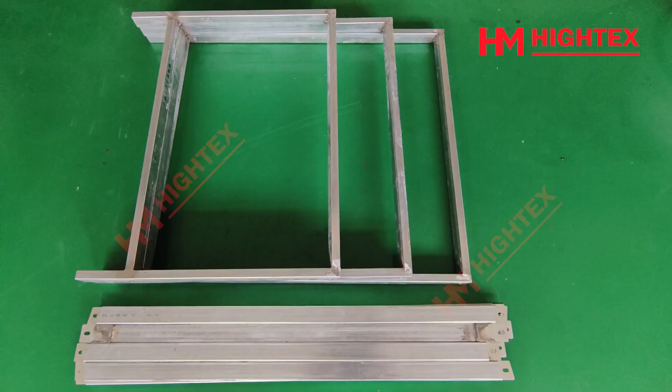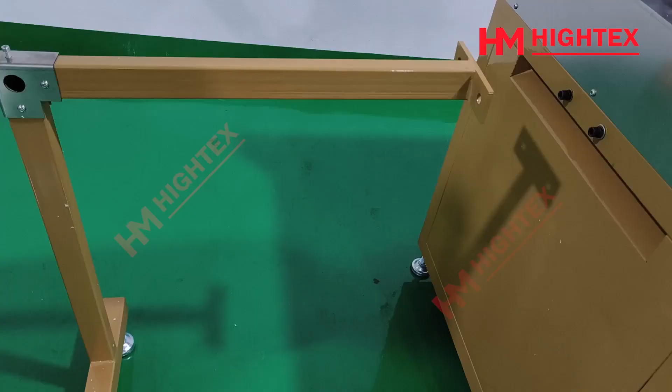Installation: take out the stainless steel racks and install them as shown in the video. Install the conveying plate onto the steel frame and tighten the screws. Take out the stand and fasten it to the machine.

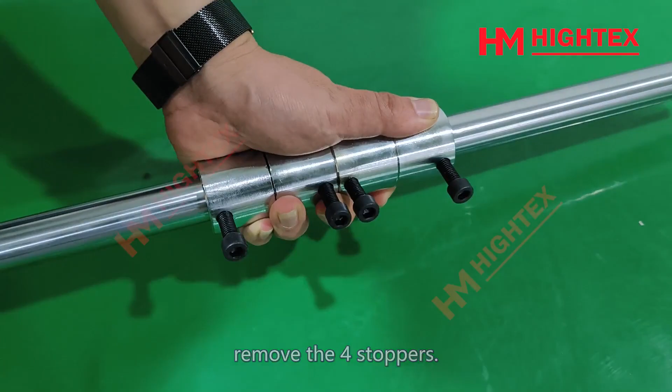This is the feeding rod. Remove the 4 stoppers, insert the feeding rod into this hole, center it, and tighten the bolts.

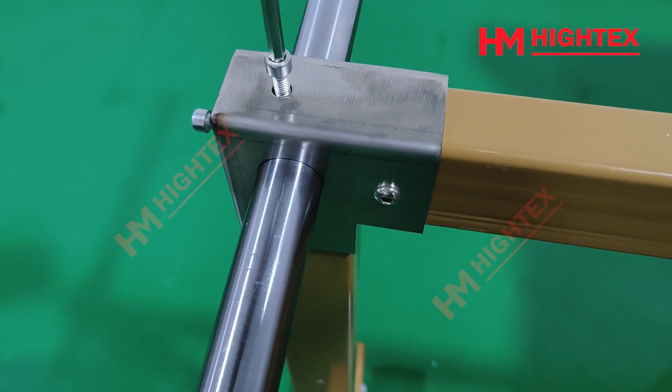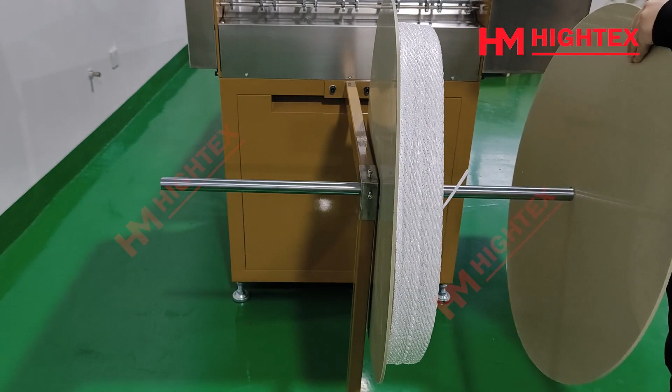Install the spacer plate and webbing strap, and attach the stopper on the outermost side. Install the spacer plate and webbing strap at the other side in the same way.

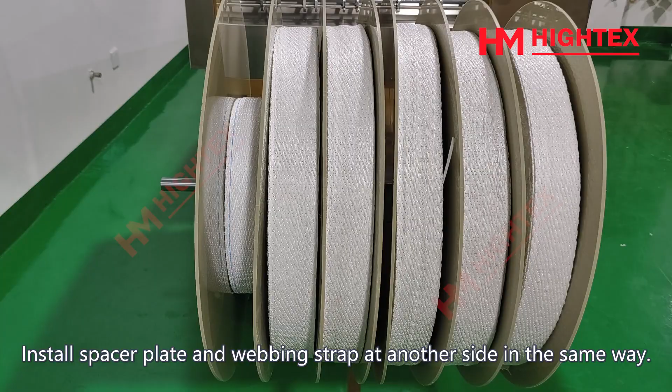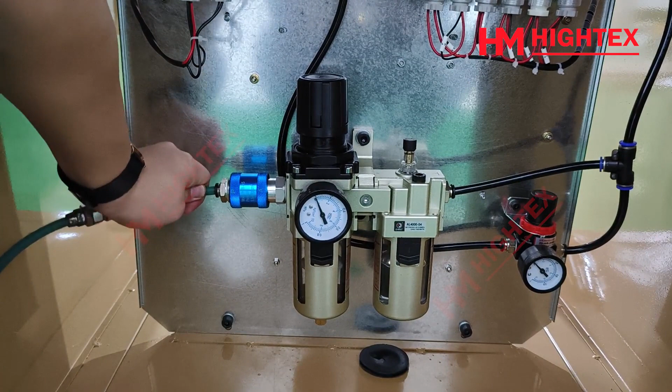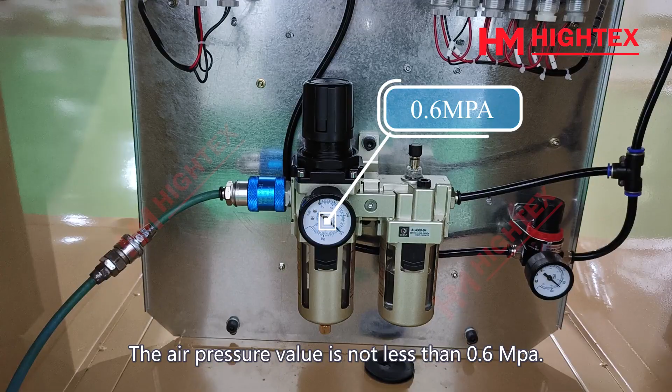2. Connection of air source and power supply. Connect to the air source, flip the blue switch to the right, and turn on the air pressure switch. The air pressure value should not be less than 0.6 MPa. Connect the power cord on the other side: the upper cable with L connects to the live wire, and the lower cable with N connects to the neutral wire.

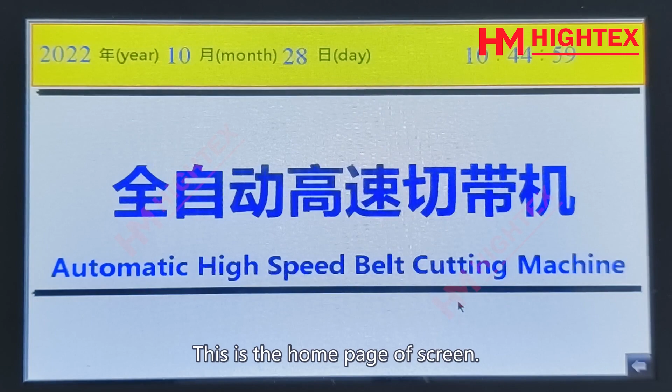3. Hand operation. This is the home page of the screen. Click anywhere to access the interface menu, then click Hand Operation.

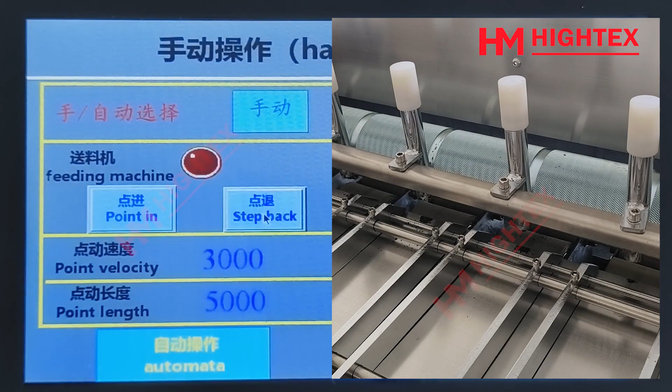Click Point In and the wheel will turn forward. Click Step Back and the wheel will turn backward. Point Velocity means the feeding speed when point marking, and Point Length means the feeding length for each point marking.

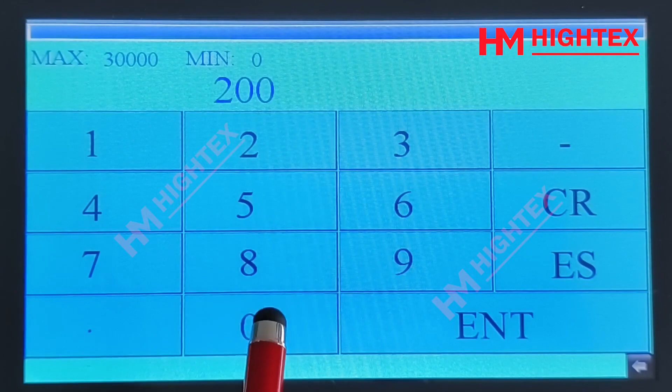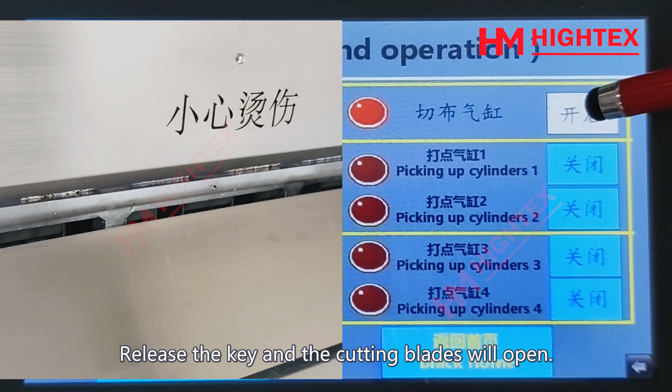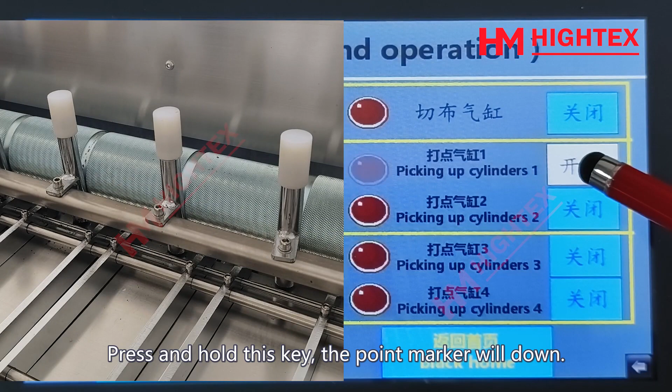This is the manual switch for the cutting cylinder. Press and hold this key and the cutting blade will close; release the key and the cutting blades will open. This is the switch for the marking cylinder. Press and hold this key and the point marker will go down; release the key and the point marker will lift.

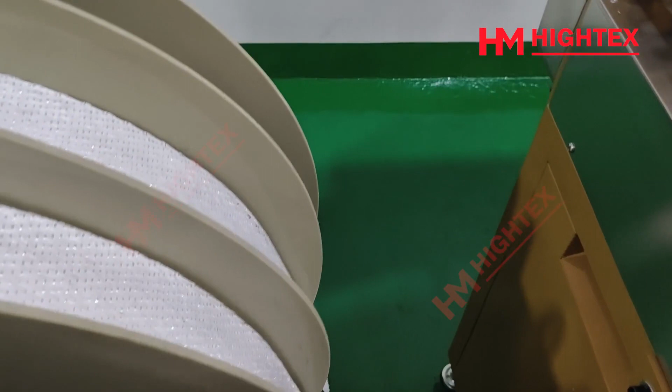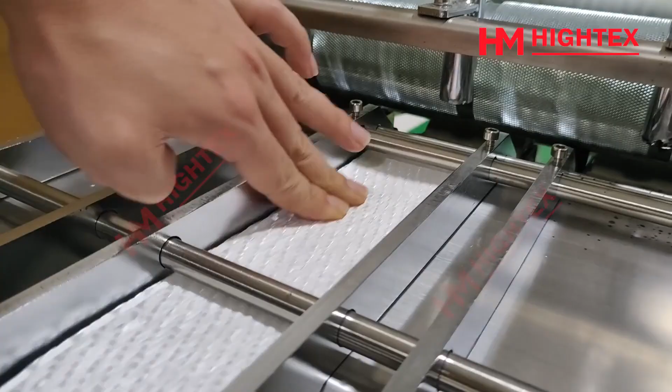For testing: load the webbing strap, move the cover, install the marker pen, then put the cover back. Install the other 3 straps and marker pens in the same way.

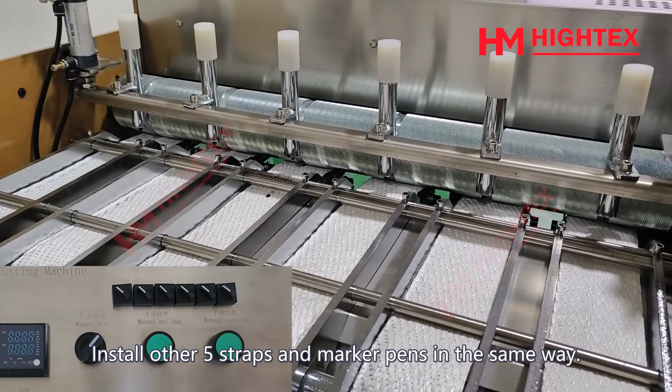Turn the switch to manual mode, and turn the 6 small switches to hold down the straps.

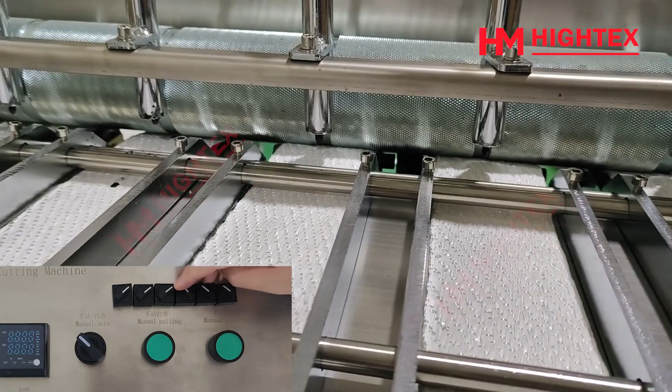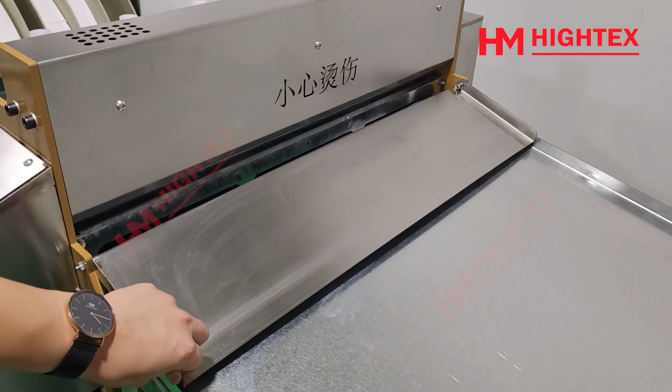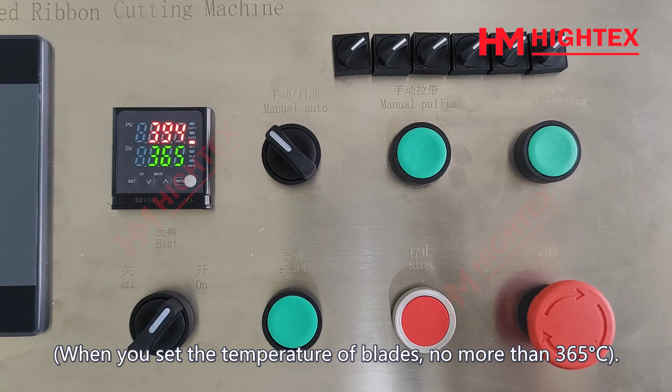Open the cover and turn on the heating switch. Wait for heating up until the temperature rises to the set value. When setting the temperature of the blades, it should be no more than 365 degrees Celsius. Press the manual pulling button to check if the feeding system works well, then press the manual cutting button to check if the cutters work well.

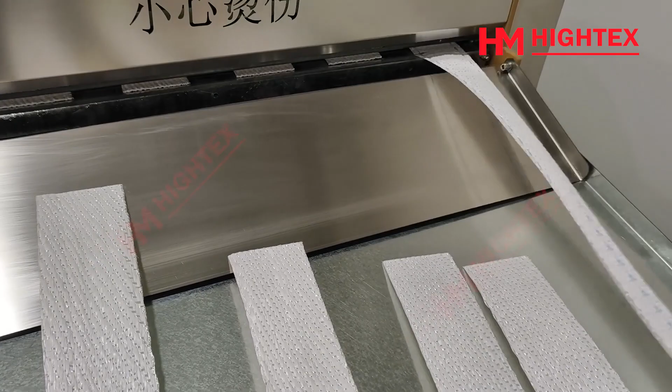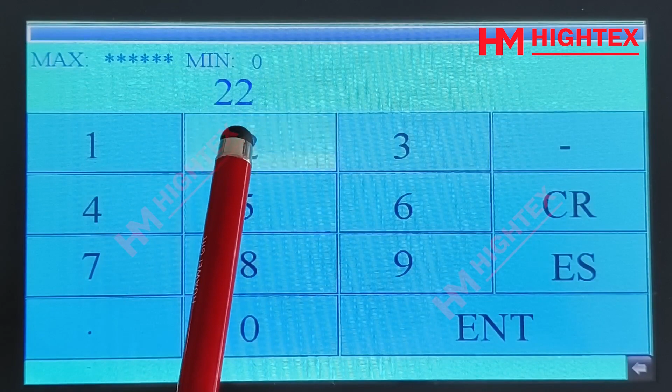5. Parameter setting. Click Back Home, click anywhere to access the interface menu, then click Parameter Settings. Click the asterisk key and input 2222, then click Enter to confirm. We do not suggest modifying parameters unless necessary.

If the cutters cannot cut straps well, you can click Cut Time to increase the dwell time.

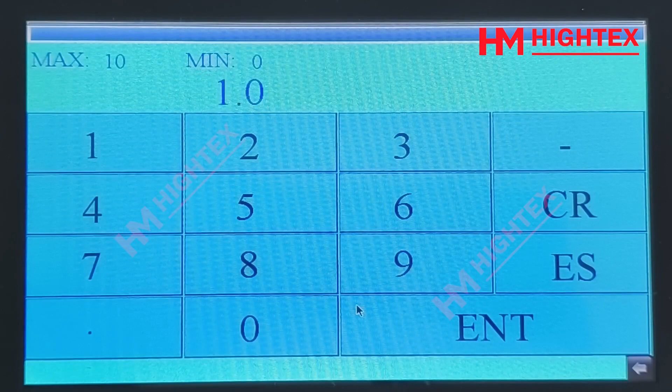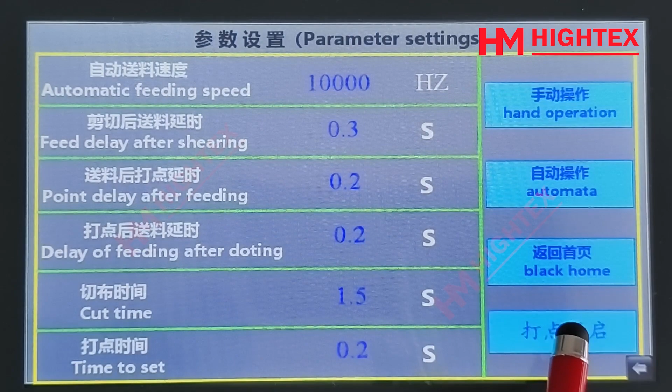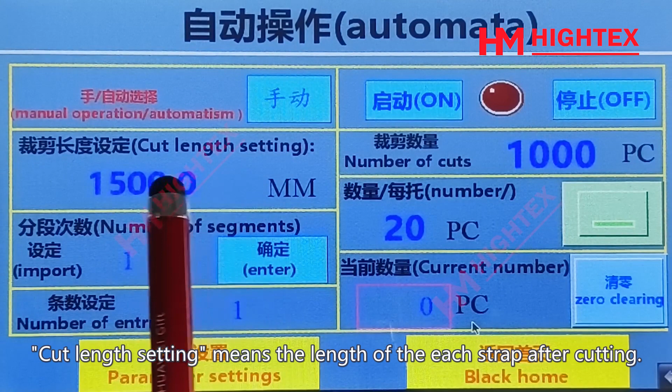6. Auto Operations Interface. This is the Auto Operations Interface. Cut Length Setting means the length of each strap after cutting. Click here to set the cutting length; for example, we set the cutting length to 1500 millimeters.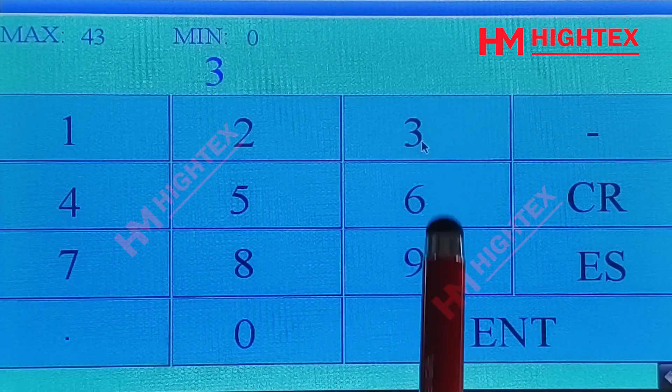Number of Segments means the number of segments after point marking. For example, we set it to 3. Then click here to set the length of each segment.

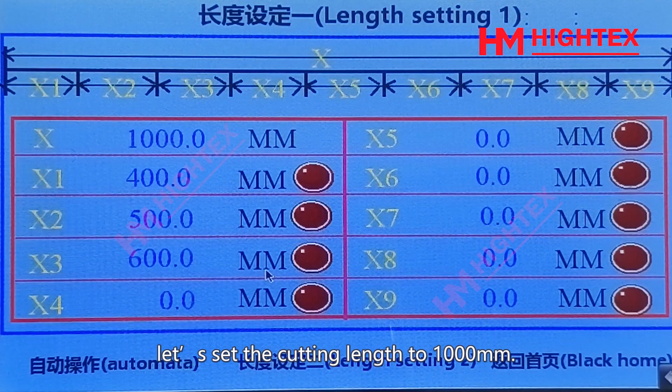X is the total length of each cutting; let's set the cutting length to 1000 millimeters. X1 is the length of the first segment, set to 200 millimeters. X2 is the length of the second segment, set to 300 millimeters. Set the length of the third segment to 500 millimeters.

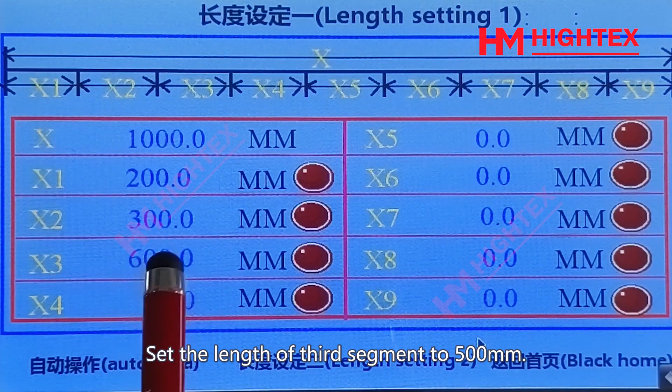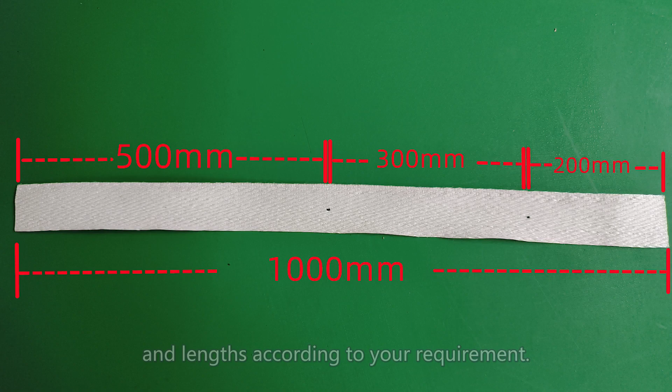Please look at the actual marking result of this setting. You can set different numbers of segments and lengths according to your requirement. Click here to go back to Auto Operations.

Number of Entries means the number of cutters working at the same time. Number of Cuts means the total cutting number.

Production task: Number/ means the cutting number for each pallet box. For example, each pallet box can hold 30 pieces of straps. When the cutting piece count reaches the set value, the machine will automatically stop.

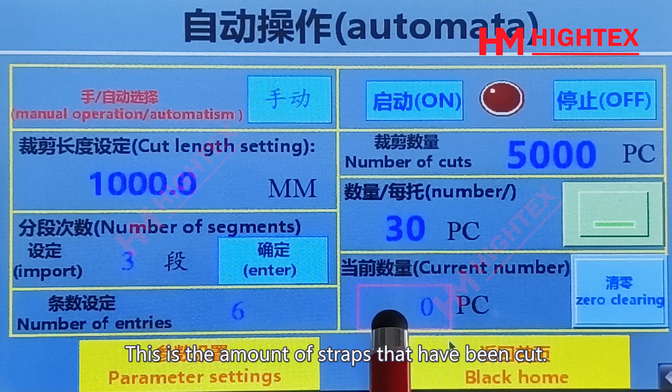When you are ready to cut straps for the next pallet box, just press the start button again. This is the amount of straps that have been cut; you can click Zero Clearing to clear it.

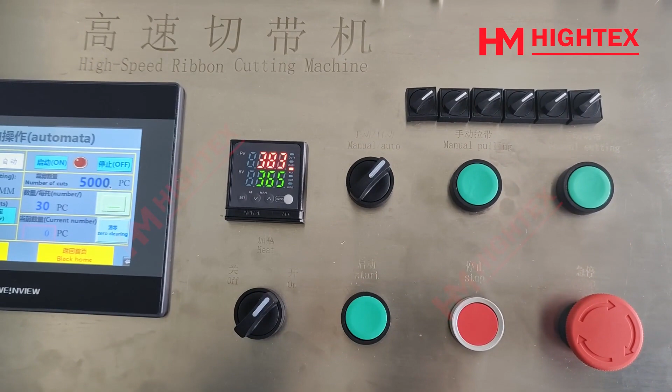7. Start automatic cutting and marking mode. Turn the switch to Auto and press the start button. The machine will start to cut and mark webbing straps automatically.